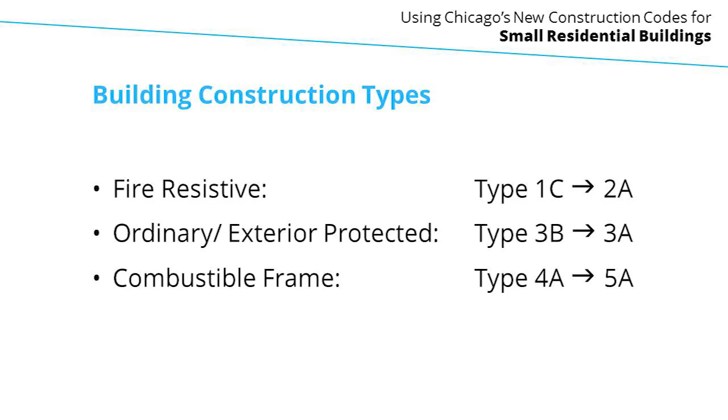In type 1C, which will become 2A, it's typically used in mid-rise residential. It's a steel frame and stud, concrete and metal deck floors, or perhaps plank, and a non-combustible exterior skin. It's usually used for 4 to 6 stories. It's uneconomical below that, and you have to go to a higher rating to get above it.

In this case, it's actually much larger than what an R5 would typically be. But what this would allow you to do is have mixed use, perhaps parking, ground floor retail, or business, that sort of thing, which R5 does not. There is no mixed use in the R5.

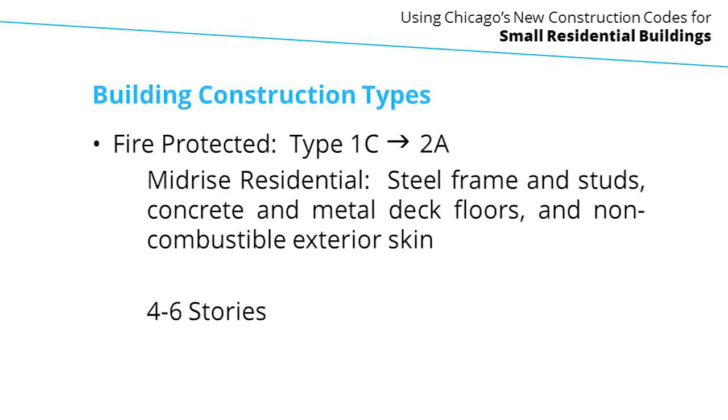This is just an example of a typical type 2A construction.

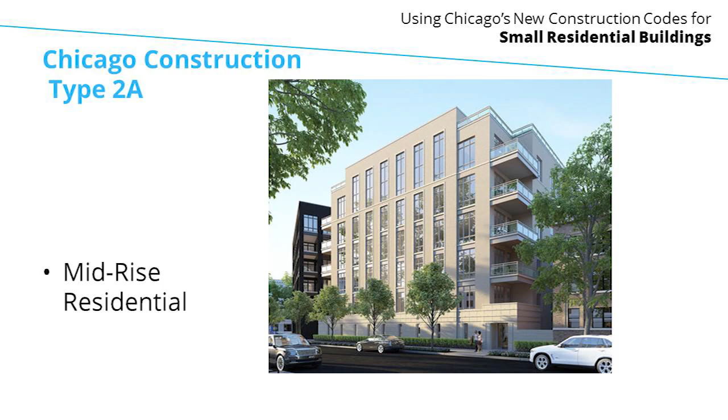So then we come to type 3B, which now becomes 3A, what many of you might refer to as bricks and sticks. It's a masonry exterior or protected steel stud, protected with gyp and sheathing and so forth. Also, again, with a non-combustible exterior skin, be it a thick or a thin skin. That'll have implication as to what the interior materials might be, such as requirement for non-combustible insulation on your continuous insulation layer and that sort of thing.

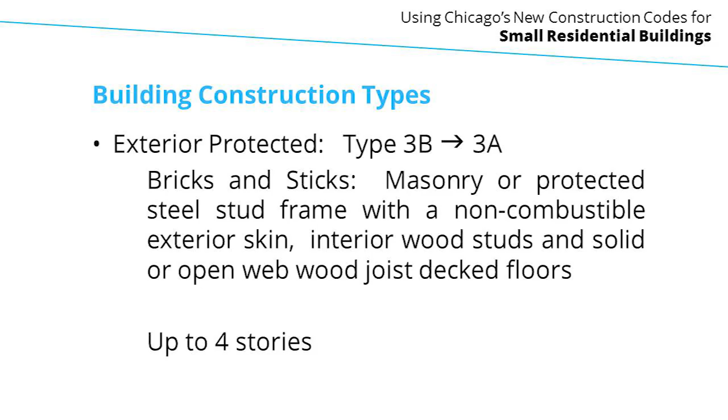However, the interior of the building, walls, floors, roof, are all combustible. Either solid wood, open web wood joist, anything of that nature. And again, wood-decked floors, which may or may not have topping. So again, this is your typical bricks and sticks, quite suitable for single family, 2 flats, and 3 flats.

And again, the new code will allow for really the same type of 3-flat construction you typically see: a duplex down, simplex, duplex up, as long as you don't exceed those 3 units or 4 stories.

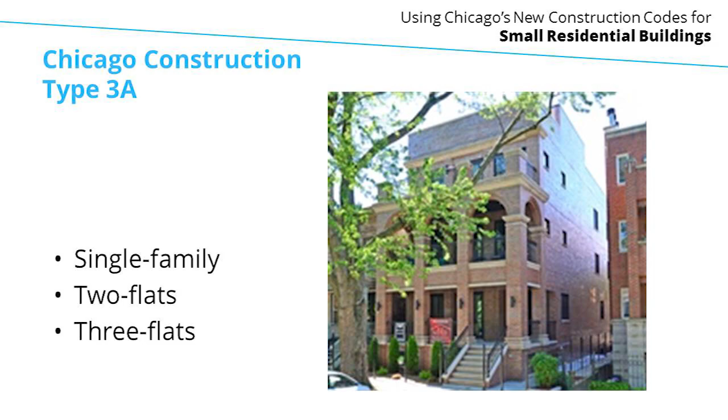And then finally, combustible frame 4A becomes 5A. Pretty much it's wood construction, top to bottom, 1 to 3 stories typically.

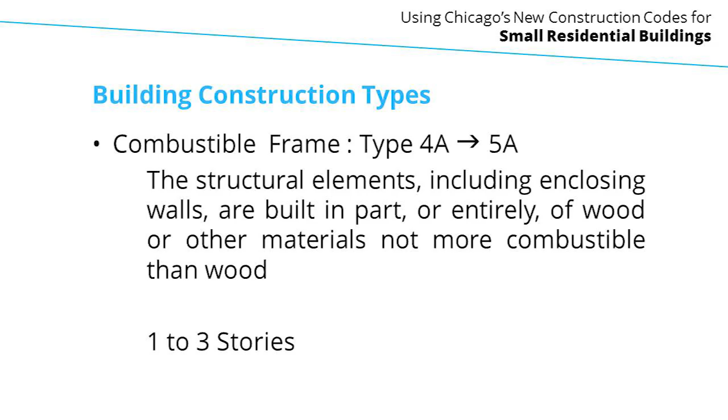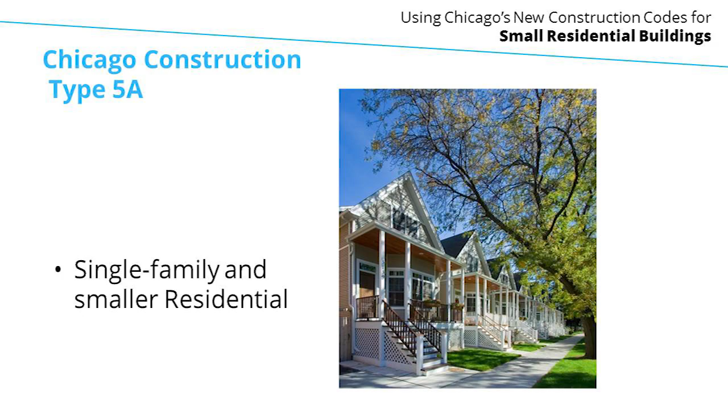So it's your single family and smaller residential style street fronts. So we get to the residential height limitations.

Current code for 1C is 6 stories and 80 feet. We now translate that into the 2A non-sprinklered, which would be 6 stories and 65 feet, or in the case of the R5, which is limited to 4 stories, it'll become 4 stories and 65 feet. If we add sprinkler to that, the 2A becomes 6 stories and 85 feet, so you've gained 5 feet off the old height.

And again, the R5 really becomes 4 stories and 85 feet, although I doubt you'd ever get to that. Type 3B, which previously was 4 stories, 55 feet, in the non-sprinklered becomes 4 stories and 55, and stays 4 stories and 55 for the R5. When you go to the sprinklered, you now increase to 5 stories and 70 feet.

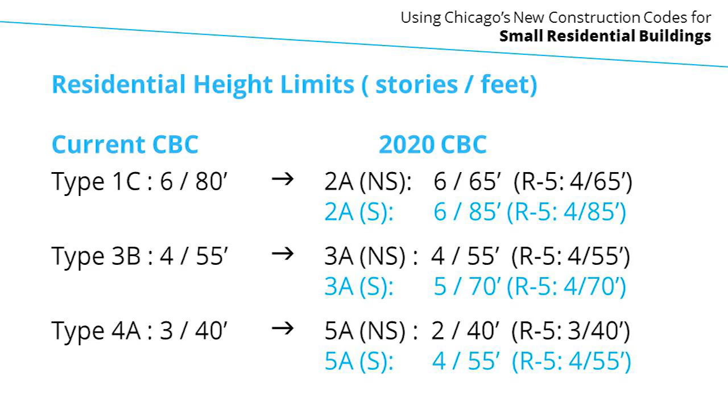Now, again, your current allowable areas, tabular areas within the current code. Type 1C, you take the tabular area for a 2-story, 1 or 2. If you go to a 3-story, it's 90% of that, and if you go to a 4th story, it's 85%. So a type 1C becomes 20,000 square foot, 3-story becomes 18,000, 4-story becomes 17,000.

Same concept for the 3B, you start at the 8,000 and work your way down. In the 4A, you're really capped at the 2 stories, so you can have the 3rd story of 800 square foot, which is not a full story. In the same scenario, if you add sprinklering, you essentially double each of those areas until you get down to the type 4A, which will become or stay 4,000 with an 800 square foot 3rd floor.

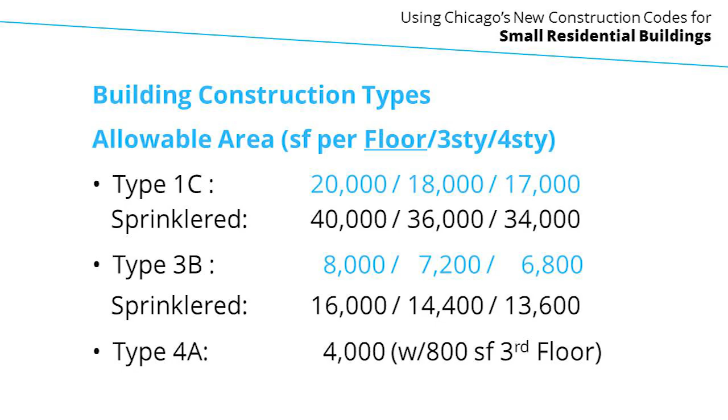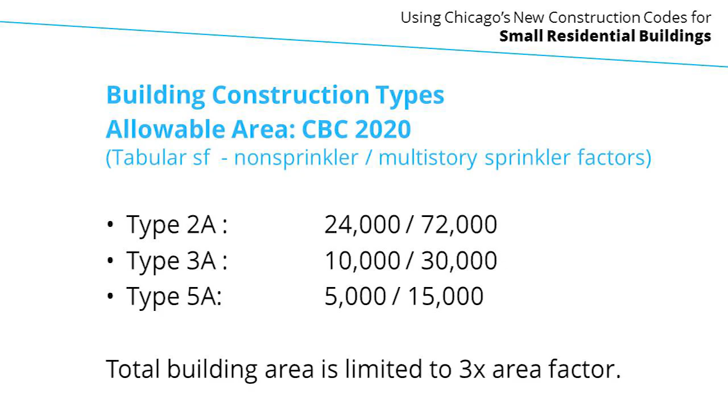In the new code, the area starts out as tabular square foot per building. The modifiers for that, and we'll get to the formula in just a moment, for a non-sprinklered building with the assumption of complete frontage - I've made no reductions for frontage on this - would double your tabular area. So your allowable in a non-sprinklered 2A would become 144,000 square feet, divided by your maximum number of floors, or your ultimate number of floors.

Type 3A works the same, and 5A obviously the same. If you sprinkler the building, you get another 100% increase on your initial tabular area, meaning that your 72,000 now is multiplied by 3, brings you up to 216,000 per building. Likewise, type 3A is 90,000, type 5A is 45,000.

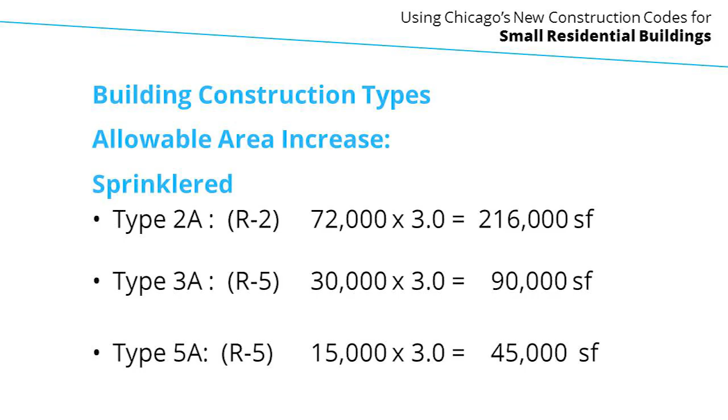Okay, the way that formula works is your allowable area increase is your base area, tabular, times your frontage over perimeter. Your frontage in the new code is between 20 and 30 feet. You get a bonus for that, where currently you only get a bonus if it's 30 feet or wider, and if you have 30 feet, you get a higher percentage of bonus. But in this case, what I've taken is 100% frontage with 30 or more foot of open area, so making it simple to give you a frontage of 100.

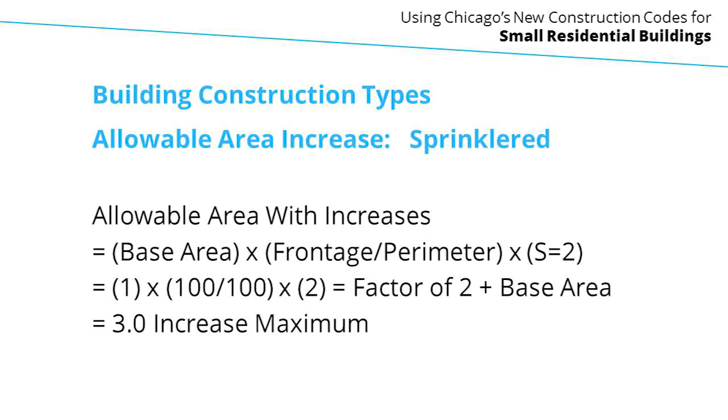And then your non-sprinklered factor, the NS equals 1, is given to you per code, it's in the chart. In a sprinklered building, it's 2; in a non-sprinklered, it's 1. So at the end of the day, you get 1 times 1 times 1 plus 1, meaning you get a 2. In your sprinklered building, you're getting a 1 times 2, meaning you get 2 added on to your base. So your increase is substantially larger.

Again, just as a note, sprinklering will be required in all but the R5 occupancies, with some very minor exceptions - so 1, 2, or 3 units, 4 stories or less. The overall frontage increases will be reduced from 150% currently to 100%, or that factor of 1, as I discussed. But again, it is somewhat offset by the fact that you do get a small percentage for that kind of gray area between 20 and 30 foot of free space.

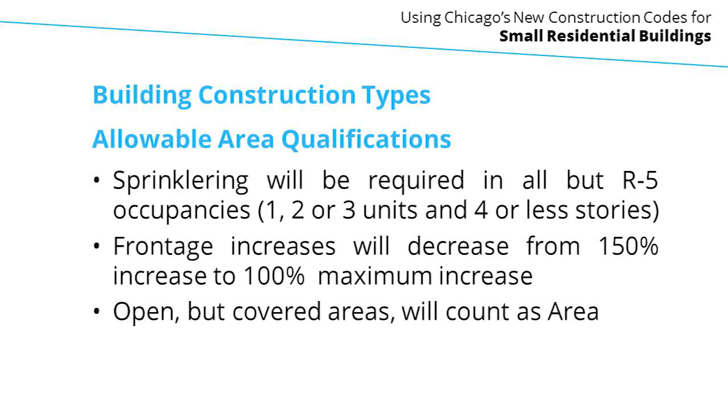The other drop down will be open but covered areas, porches and so forth, decks, will count as area. So even if the sides are open but it is roofed or covered, it will count as area. Again, the feeling is that there's enough area built into the original tabular areas with modifiers that it really should not affect the overall end result.

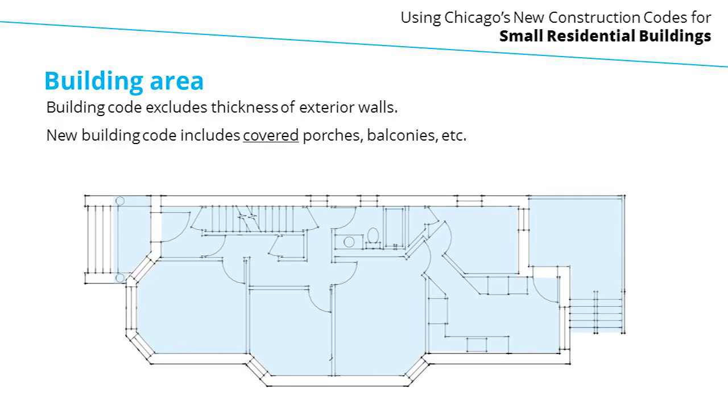If we look at fire ratings of exterior bearing walls, on a 1C currently, that's a 2-hour rating. What happens is the modifier for the 2A, or the new code, from 0 to less than 3 feet will be a 2-hour requirement. From 3 foot to less than 30 becomes 1 hour, and above 30 feet there's no requirement for rating. Likewise, 3B, which currently is a 3-hour rating, drops to a 2 at that 0 to just less than 3. 3 to 30 becomes 1, and above 30, 0. The 4A, 1 hour, becomes increased in the 0 to less than 3 foot, but at 3 foot drops to an hour.

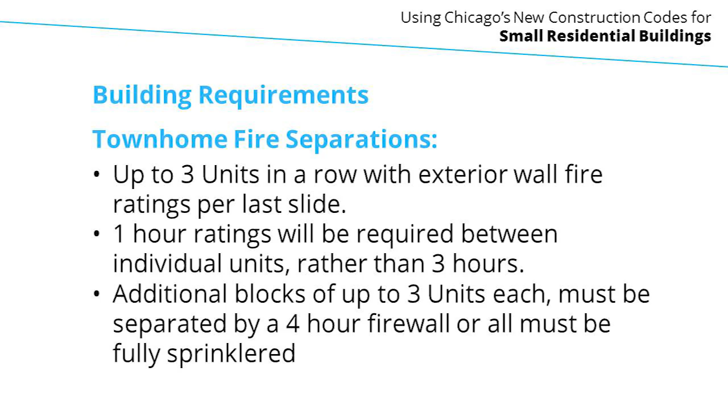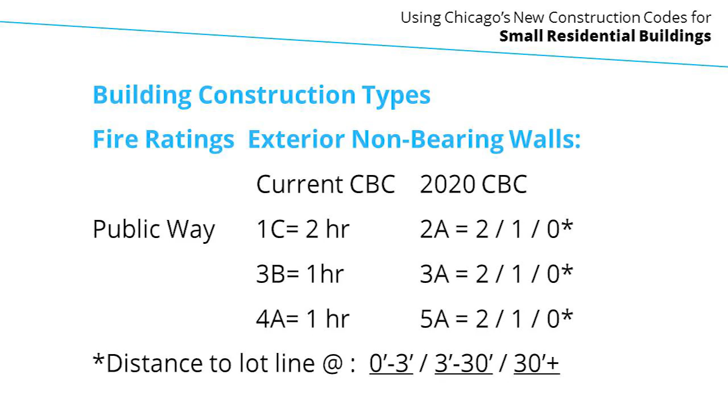Fire ratings for exterior non-bearing walls. Again, current Chicago code has it pretty much as a 2-1-1. The new code will be up to 3 feet will be 2, 3 foot to just up to 30 will be 1, and then 0, similar to the bearing wall enclosures. It really is all based on distance to lot line. The other thing we'll discuss in a few moments is the openings in those walls for windows and so forth. You will now be, for non-protected openings, limited to the percentage of wall opening.

Good news is type 3 construction currently requires a parapet above the roof. In the 2020 code, no parapet will be required as long as you have a Class C or better roof covering and you protect the deck for 4 feet around the perimeter of the building. That can be either a non-combustible or a protected deck.

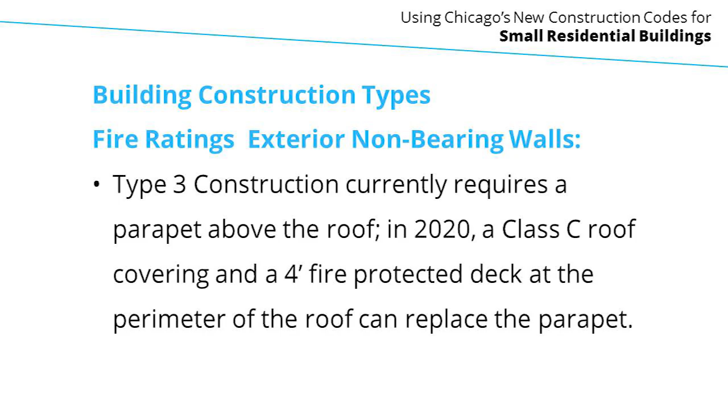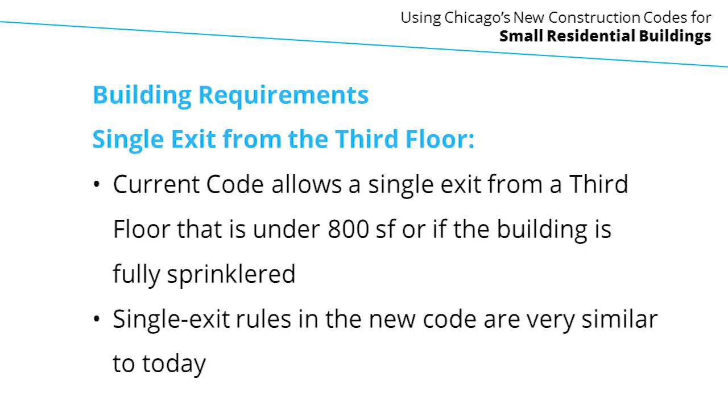The current code allows a single exit from the 3rd floor if it's under 800 square feet or if the building is fully sprinklered. The single exit rules will really be very, very similar for the new code, so not much change there. And again, the current code requires a 42-inch high guardrail. That will be reduced to 36-inch in the R5.

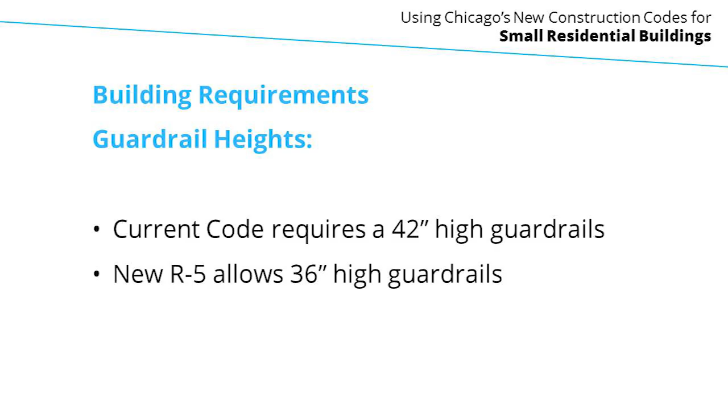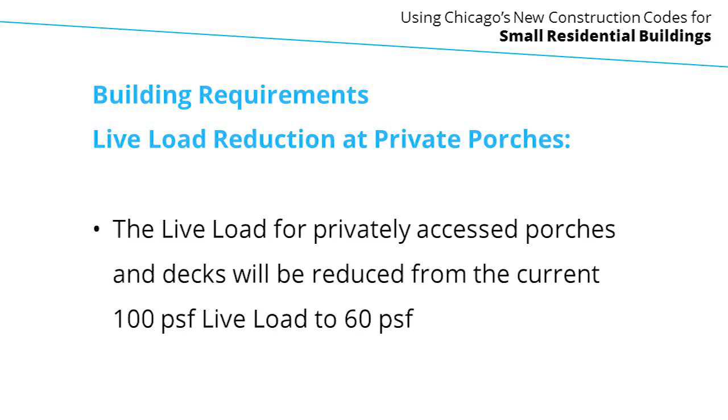Live loading for privately accessed porches and decks will be reduced from the current 100-pound live load to 60-pound. That is specifically for privately accessed decks and porches. Your back porch, exiting from the third floor or whatever, will be maintained at 100-pound live load because it's accessed by more than one unit. This is the same comment on the seismic and wind loading that Grant went through.

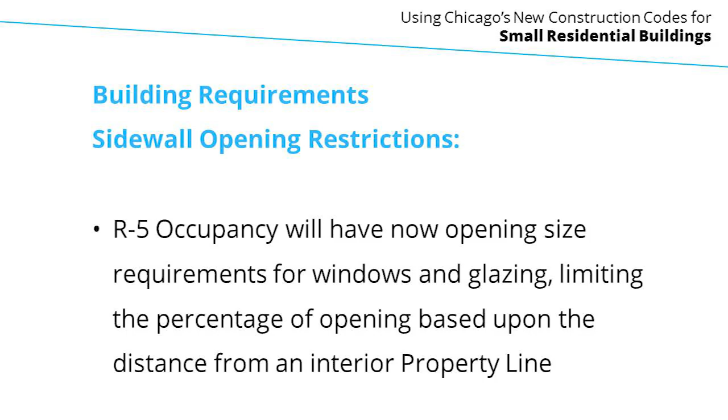R5 will now have opening size requirements for windows and glazing, limiting the percentage of openings based on distance to the property line. What that graphically means is at 0 feet you get 0 openings. At 2 feet you get 10% of protected openings, or the building must be sprinklered. At 3 feet you are now allowed up to 25%, and at 5 foot you then reach the no limit on glazing.

On the non-sprinklered and unprotected building openings, again, 0 foot is 0. At 2 foot, you are allowed 5% of the wall in unprotected opening. At 3 foot, you are allowed 25%, and by 5 foot, you are allowed that same no limit.

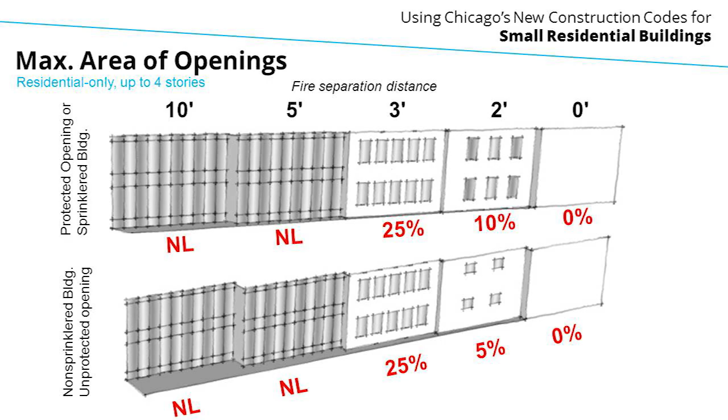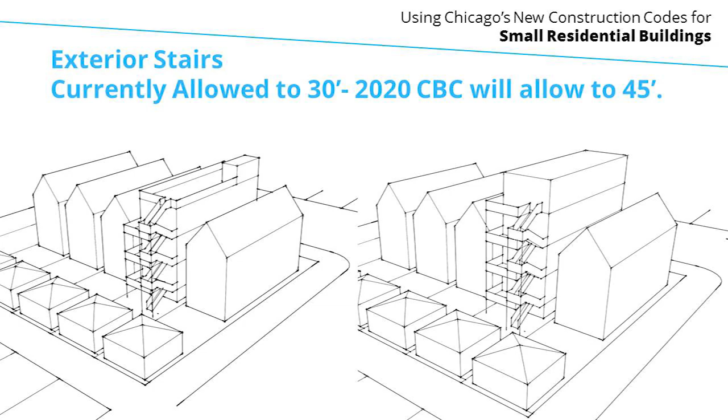Currently, exterior stairs are allowed to be 30 foot in height, with the addition of another 15 feet for the 2020 Chicago Building Code. I'll now turn it over to Carl.